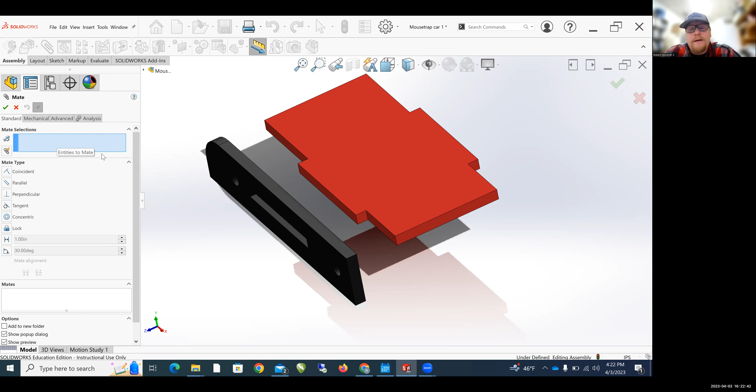So the first thing I'm going to tell SolidWorks to do is which two faces do I want to touch. I'm going to select one face on the Mousetrap car base and one face on the side frame and tell SolidWorks to stick them together.

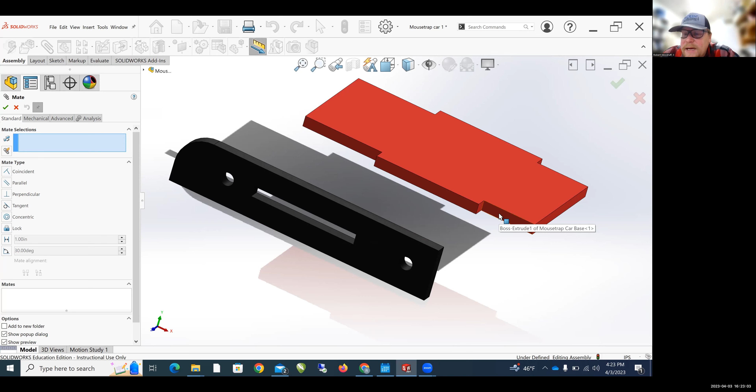I'm going to click on this face right here, just to the right of the tab. That face should be touching the inside of the side frame. So I'm going to spin my assembly around using the center scroll button, and then click on that inner face. What it did is it just made those two faces touch. If I scroll around here, you should be able to see that those two faces are now touching.

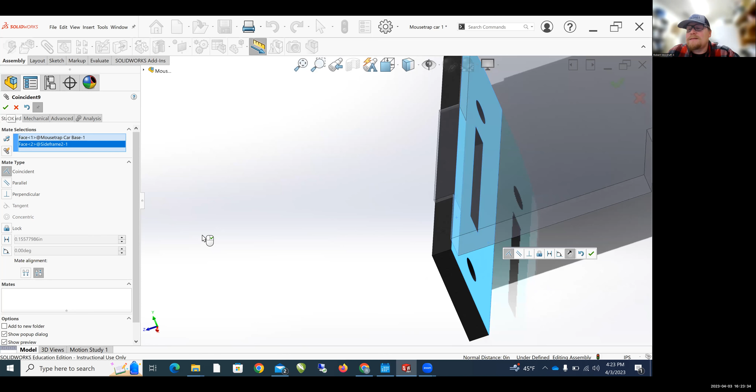There's a green check mark up here in the upper right-hand corner, one in the submenu, and one on the left-hand side of the screen. Any one will work, so I'll click on one of those. Now you should see that the inside face of the side frame is touching that face of the Mousetrap car base that I selected.

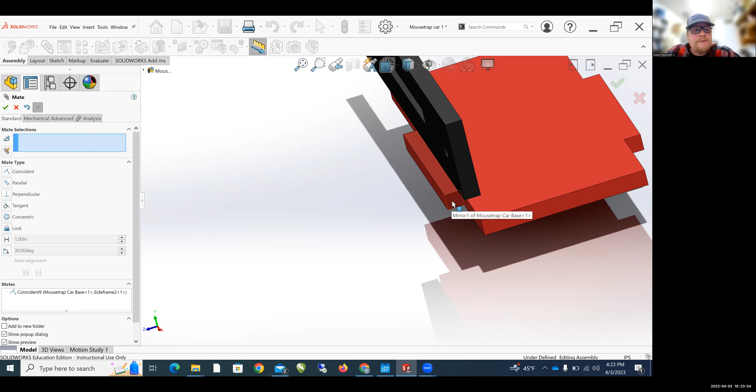Next, I'm going to slide this up because I want to see this face right here. I'm still in the mate tool, so I'm going to select that. I'm selecting the far right side of the tab, and I'm going to swing this around again, zoom out and then back in, until I can select the inside far right side of the slot. I want those two surfaces to touch.

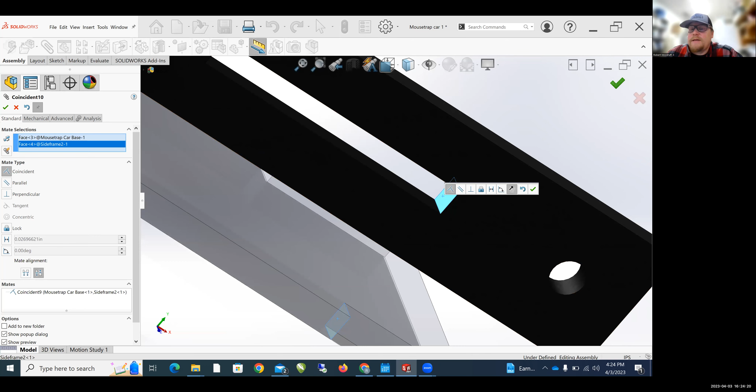So I click on that, and now I click the green check mark. Now what you're going to see, if I zoom out, is that I can only move this up and down. I'm going to hit Control-7 to go back to isometric view. I can't move it left and right, and I can't move it away from the Mousetrap car base, because we've mated it in two places.

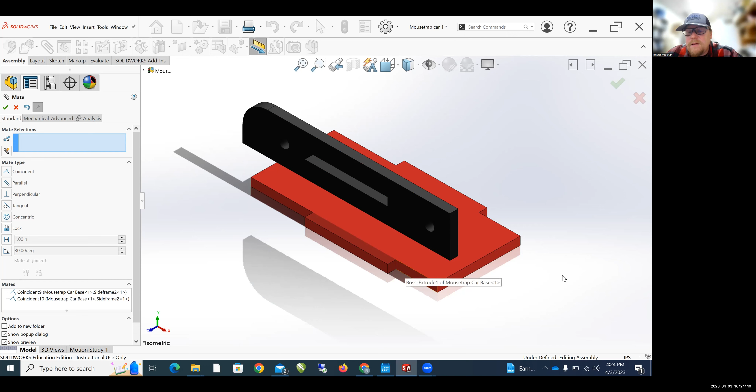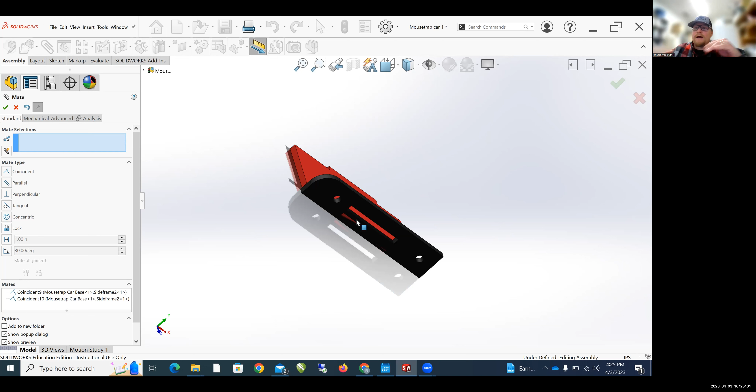This surface right here that I'm pointing to is mated to the inside surface of the side frame, and this portion of the tab is mated with this portion of the slot. So the only thing I can do right now is move this up and down. We've mated in the Z direction, in and out, and in the X direction, left and right. The only thing we have left to do is mate in the Y direction.

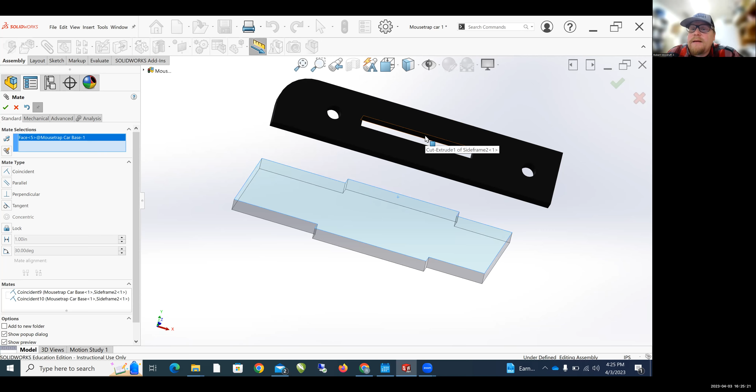I'm going to hit Control-7 to get that isometric view again, and slide this up so I can see more of my Mousetrap car base. What I need to do is click on the top of the Mousetrap car base and mate that with the bottom of the slot right here. I'm going to zoom in, click on that, and click the green check mark.

Now when I zoom out and hit Control-7, you're going to see that this side frame is stuck. I can't move it to the left, I can't move it to the right, I can't move it up, I can't move it down, and I cannot move it away from the Mousetrap car base. So it's stuck in place, and that's exactly what I want. This is what you're going to have to do.

You're going to have to repeat this mating process throughout the entire assembly to stick these different parts together. I will pick this up in the next video. Oh wait, first thing I want to do is just click X to get out of this mate tool. And I think it's really good practice.

Let's see if I can get this menu to go away. I don't even know if you can see this menu. There's a zoom menu up here because I'm recording in Zoom, and I cannot get that to go away right now. Up here at the top, there should be a red light, green light.

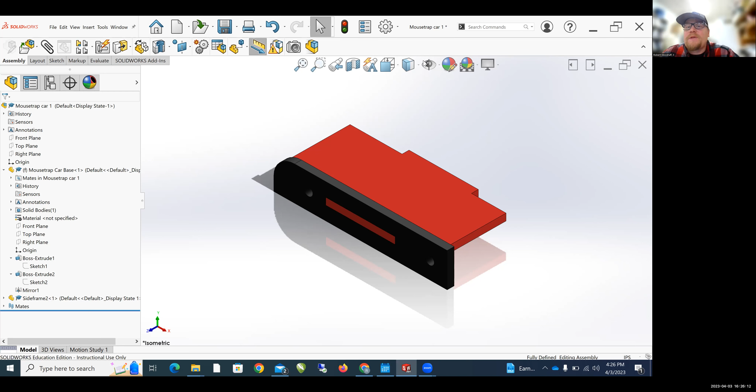There we go. I want to click rebuild, and then I want to hit save. It's going to ask me if I want to save all the parts. Oh, it didn't, so we're good to go. If it asks you if you want to save all the parts, click yes. But now we're saved, and we'll move on to the next video.